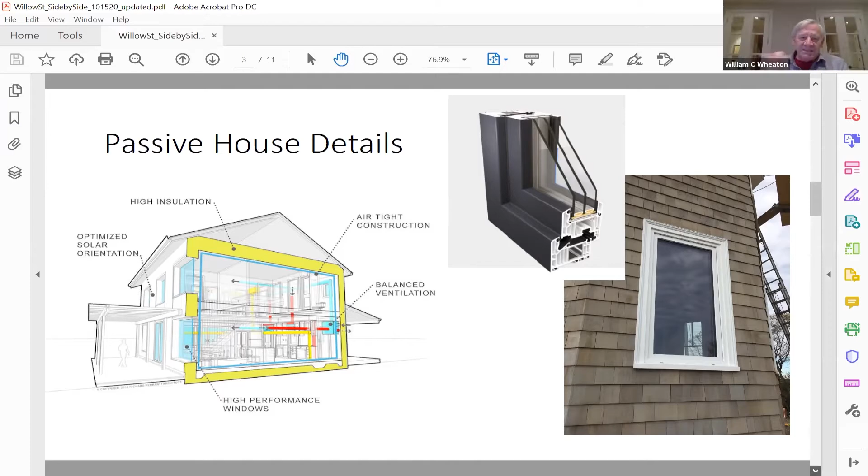I understand, yeah. I would be against that. I don't have any interest in seeing that kind of window, don't find it interesting at all. I like just seeing the plain window with what I call cell bars.

Well, why don't I follow up on it? I'm happy to follow up on it. To the degree that there's a continuing debate, I don't see the need for that kind of stuff.

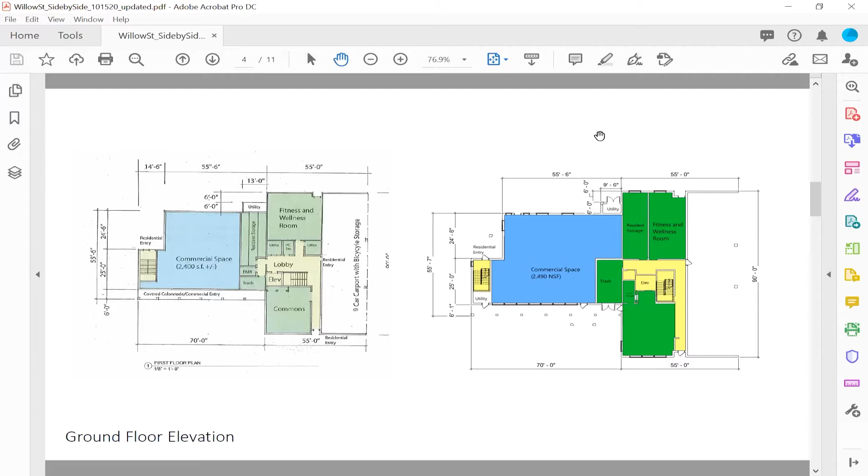Besides which, you can buy, I've seen plastic ones that you can put on the inside and they just snap in and out of place, and they look on the outside like they're there, but they aren't there.

So this is what was, I apologize, it came later than I had hoped, but hopefully this side by side cuts to the chase for you a little bit. Let's talk about some of the changes that you see. I'll walk through these, and feel free to stop me at any time. If I'm going to answer the question in the next slide, I'll tell you.

So on the left, you see the rendering that was approved, or the floor plan that was approved, and on the right, you see our Revit model. So this is like real 3D modeling, whereas before they were more conceptual sketches, which is totally normal given where they were at that stage.

Couple of changes—really no change in the net square footage of the commercial space. I don't know that this was ever really 2,400 square feet when we sort of reached it over. We need a little larger trash room to account for potential commercial use as well. We thought the fitness and wellness room we could fit, we might sort of bend this around a little bit.

Ultimately what we're going to have here, even though these are two separate colors—one showing an egress path—I hope to have an open sort of area for what they've called the commons. This will be a double-sided elevator. It's not showing very well right now, but this will be a double-sided elevator.

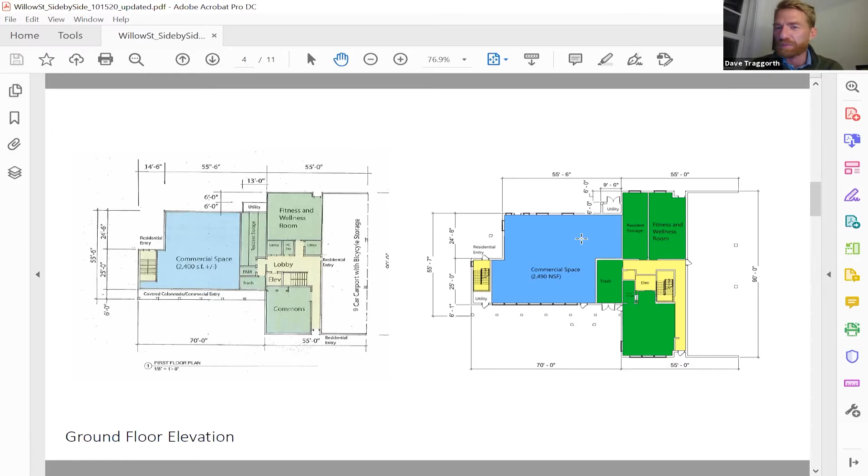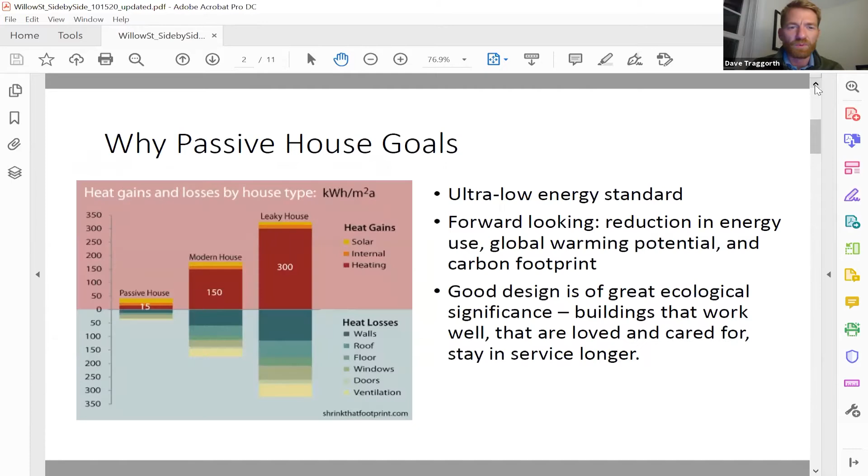There are decisions we've made that could have picked up a little more energy performance, or made things easier from a different perspective, that we have not done because we want to keep it as it appears. It's kind of a funny answer, but I think it's related to the fact that this was permitted. My house has cedar shakes, it has a gable roof, it has all of these things, and I like it. We liked the design.

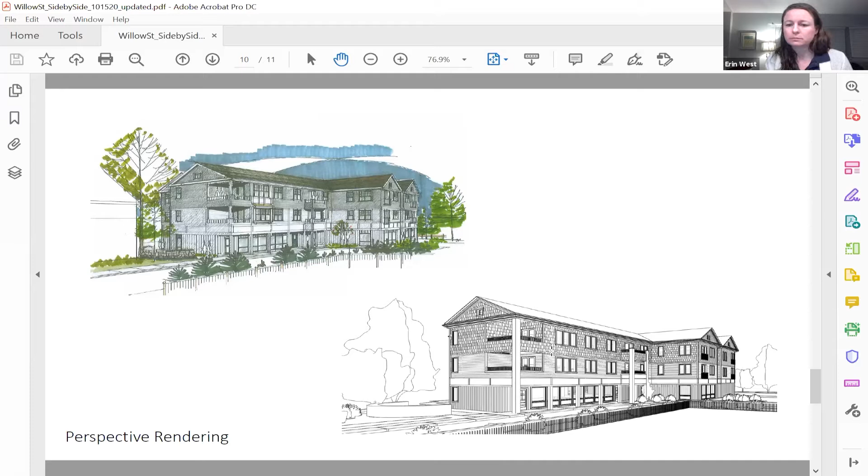I think we have some architects on the board and others, we're happy to take your comments. This is absolutely not a finished product, and I think more minds looking at this, the better. Can we do everything? No, but I love getting the feedback.

One of the things that I think is really helpful in a building is to help make the entryways and the main doors more prominent. I think that might be an area you may want to focus on that could be useful.

Very much agree. So basically the main entry door is right here. I think we want to figure out how to tell people, hey, the entry is right here, so you know where to go. There's a lot of glass and a lot of doors. I think we have to figure out the same challenge for the commercial space.

Well, that's all I have, folks.

Yeah, this is Dan Ham. The big thing that I see when I'm looking at this elevation in particular, and also in the 3D, is that the lines aren't really broken up at all on the second and third floor, and it kind of reminds me of a hotel. I don't think we want to go that direction in that area of the town, or any area of our town.

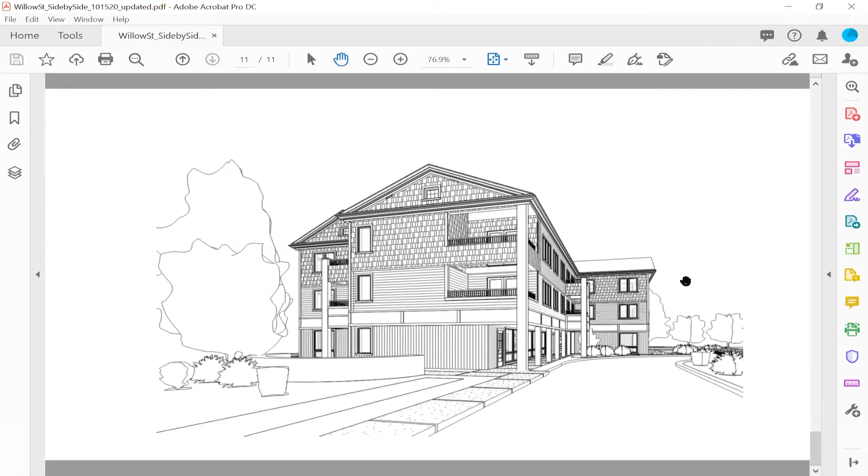To be honest, it's going to be end on to the street. You're either going to be driving in or walking, right? And the entry point's all the way over here. The commercial space is obviously right here. But that gives you just a little bit of a - this is sort of like if you're standing in the neighbor's house looking at the building, this is what you'd see.

So I think the two primary facades in my mind are this one, which is facing the parking and the driveway - you're coming in from here, driving down in front of the building and around. To be honest, this one, because you're going to be turning around and coming in to park, right?

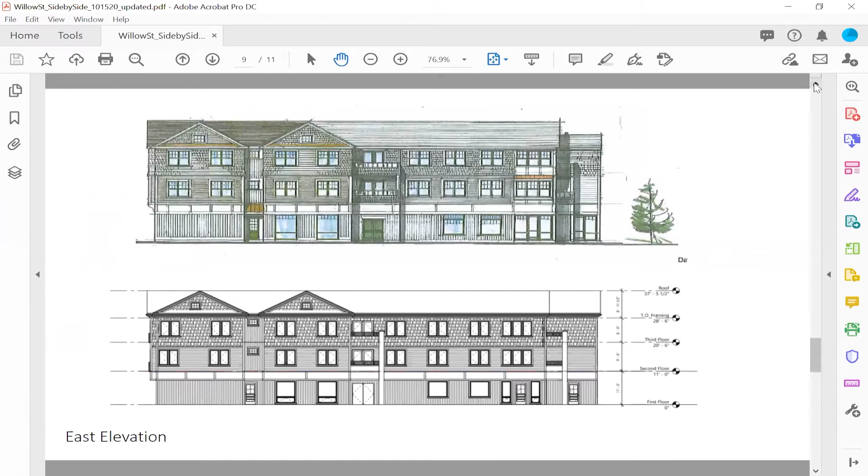But the back side of the building is this. Very few people are going to see this elevation. Right, but I think the other two are critical because you'll see one completely from the Black Cow parking lot and the bank, and between. And then you also see the other elevation, the west elevation, through the trees.

Yeah, no, I completely agree with you - those are the two primary facades. I think if you break it up in materials, it should work. Yeah, let us study this. You've got it broken up on the right side by the gables, and let us study this a little bit more. Right, totally. Okay, and then do check out the windows.

Richard has his view, but it's certainly true that the more traditional windows in New England are all muntin bars. I'm not pushing any particular scheme, but just any 2-over-2, whatever - just see what's possible. Yeah, we will absolutely talk to the manufacturer.

I agree with Bill on that as well. I think that if you have this traditional design, then clearly you would have some type of window that had mullions of some sort, whether they're plastic inserts or integral to the windows themselves. I think that would be consistent with a traditional New England design. Okay.

Dave, Rick Mitchell, I know I'm not supposed to be talking, but this is just a question. On the west elevation in your modification, those two ends, I don't know what you call them, where they bump out.

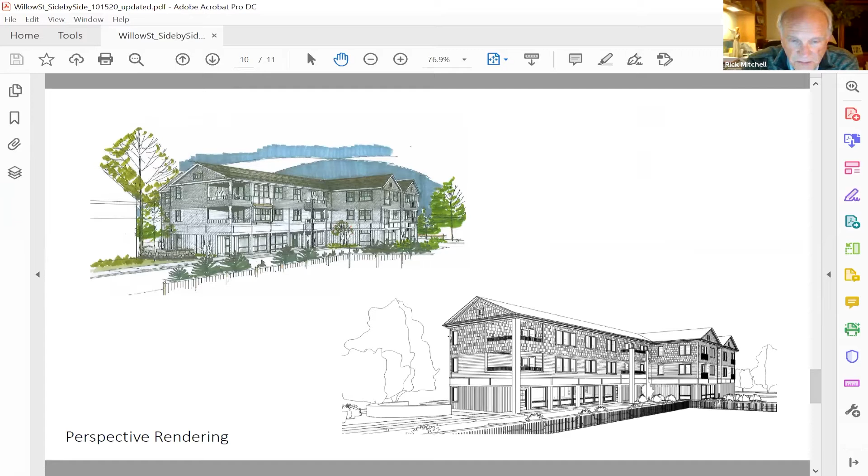So on this drawing, it looks like it's one continuous facade. Yeah, there's... there you see it. Yep, on the west elevation you don't. And that's why I think Dan and other people look at it and it looks like one slab.

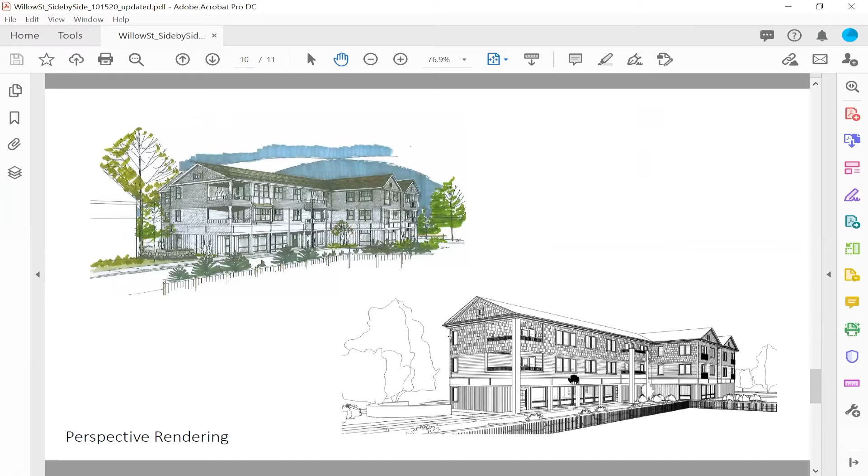I think it looks like one slab in this view too, Rick. Yeah, I see what Dan is saying. I think you're both right in the sense that it definitely breaks it up as far as these coming way out, and you've got these indentations here where this entry is. I think we need to figure out this corner a little better. And we're totally up for that.

Okay, great. So you guys have some homework, and we have to decide tonight if it's a minor or major. I think what would be helpful for me is if you guys could approve this as a minor. Obviously it's your choice, but this is what would be helpful for moving everything along. Approve it as a minor mod, approve these plans with maybe just two conditions: to come back and talk about the windows and to talk about that corner.

That would be fantastic. Can I ask you one more question? Yeah, simple. Where is Willow Street in relation to the drawing that you've got up right now? You would be standing on Willow Street. Okay.

So that's the front of the building, correct or not? That's the front of the building, although there's a lot of depth to this image. Right, so this is the closest to you, this is the next closest, and then these two wings behind are furthest away. Okay, but it's behind a barber shop and a toy store as well. Right, that's true too. Yeah, I mean the Max is right here, basically.

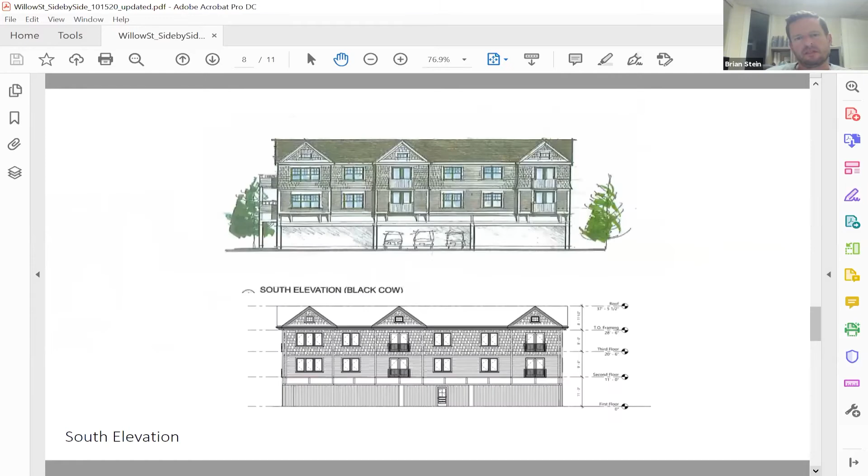Can I make one quick... sorry, I was looking away. Where is Max? So this is the elevation right here. Okay, that's that gable, that's the other gable. And Max is right to your left on this elevation, on this view.

Yep, so all of those buildings are going to be gone? No, Max is staying. Oh, Max is staying. It's just a single family home there currently. Yeah, this is in place of the single family home. Okay, so Max will continue to be what it is. No change.

There was another question, I think. Can I make one quick comment? Yeah. In the same boat as Rick, but not that this will do a lot, because you've already broken it up with the balcony on the west elevation. Those two balconies — can you go back to that elevation real quick? Yep.

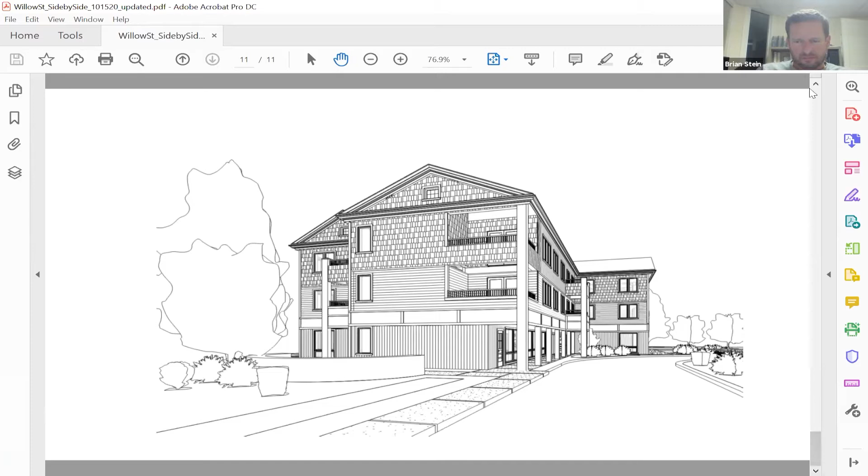Yeah, so in the middle of there, the balconies that stick out there. Yeah, those. What if you put a roof on top of the third floor one, a gable, that would help protect that, and the one below, and might break that up a little bit. I mean, it's got a little depth already with that, but having that extra roof might help overall break that mass up a bit. Yeah, we'll study that.

Patrick, might I suggest that the board approve or say that the floor plans, the amendments to the floor plans, are truly minor? Nobody's had any question about that. And that the questions people are raising are all about small exterior changes, and we just hold off on that for a week or two and see what Dave can come up with.

Is that part of what the meeting is to go on? Yeah, I think that's perfectly acceptable, that the board finds the revised floor plans you've submitted are fine. Nobody seems to have any questions about them. And then we hold off on the exterior, since the majority of the talk is sort of coming on the bump out.

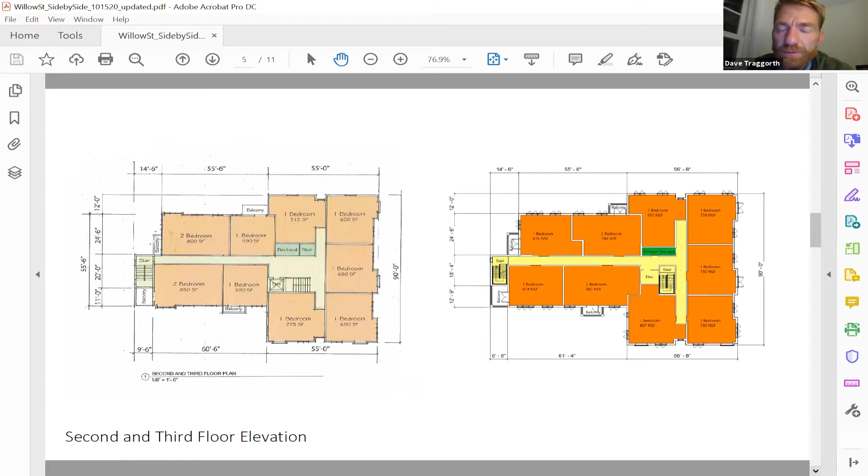So I'm fine with that as well. But to be clear, the floor plan change created the bump out going away, which created the facade problem. Yeah, I think that's one thing that would be helpful, is to tie those two together, and why I'm being specific about what you would like to study further. And it'll also just help us keep everything moving.

So if it could be that approval, but for window grills, and but for the materiality of the west elevation that you want to talk about more, then that would be ideal in my mind, because it really is tied to the floor plans. And I think I'm also totally game for coming back to you all at a later point and talking about color, materials, more specifically — like what color is this, what are these — as we start to really color this in.

But I think what we want to make sure is that we have a building shell and a floor plan that we can really move forward with.

I have a comment that came to me about needing to vary the ridge line some as well. Is that something that is possible? So this is interesting.

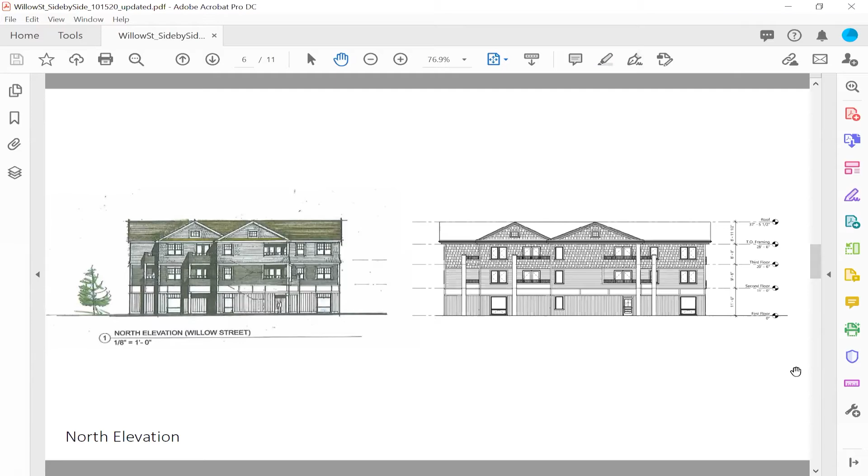And I think that's one point where, with the views of the building, you won't notice the roof line as much. Yeah.

So what's the flavor of the board? Can we get a motion from anyone? I mean, I think it's definitely a minor change, and I commend them for keeping the intent.

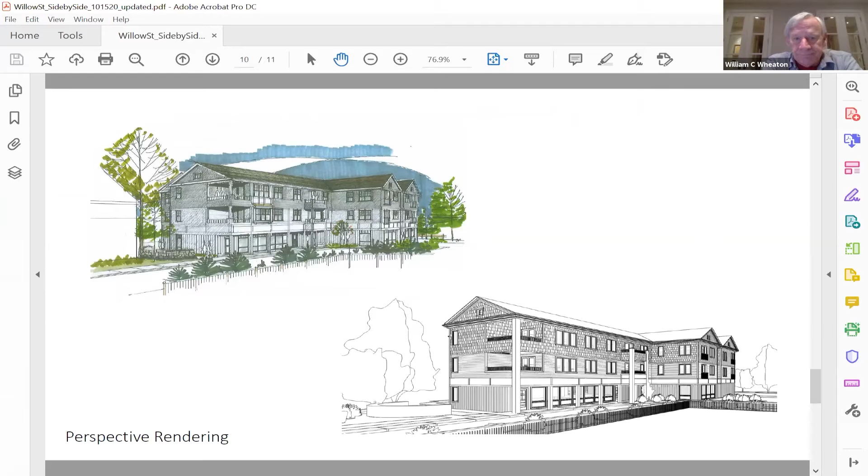So I would make a motion that the board approve the overall modified floor plans, footprint, floor plans, unit configuration, and scale. And we just hold off on the exterior for further review of modifications, minor modifications.

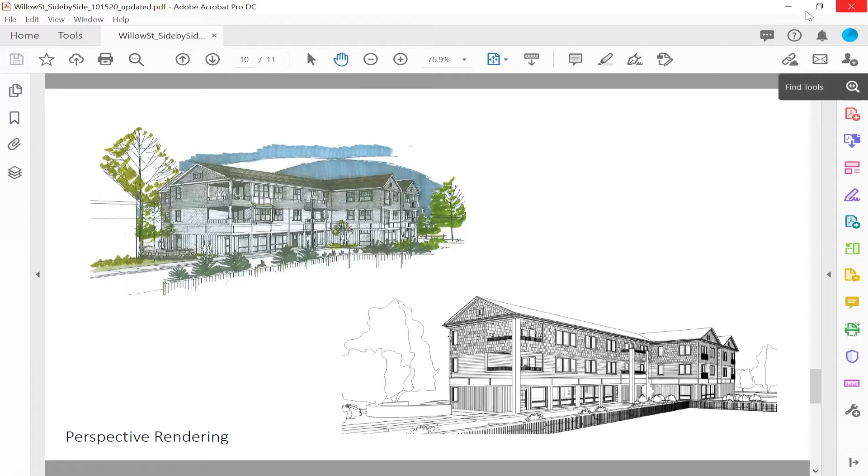I think it could be contingent on it. It just depends on... I think it should be contingent on it. I mean, I think their intent is pretty clean and fitting with character, and I think we're just asking them to do really a materials change versus any real structural or physical change.

Just as long as Patrick's willing to bring it back in front of us, versus putting all the pressure on him to approve any of those material or physical changes. But there is a motion. Is there a second right now on that? I'm happy to amend that motion. Patrick, you want to chime in here about how we ought to phrase this?

Sure. I think you'd want to make the motion that the board accepts the floor plan as shown on the electronic plans transmitted to the board on October the 15th are acceptable to the board as submitted.

Yes, and we just say that. Yeah, simple as that. So there's no negativity anywhere. Yes, I would make that motion. Do we have a second? Second.

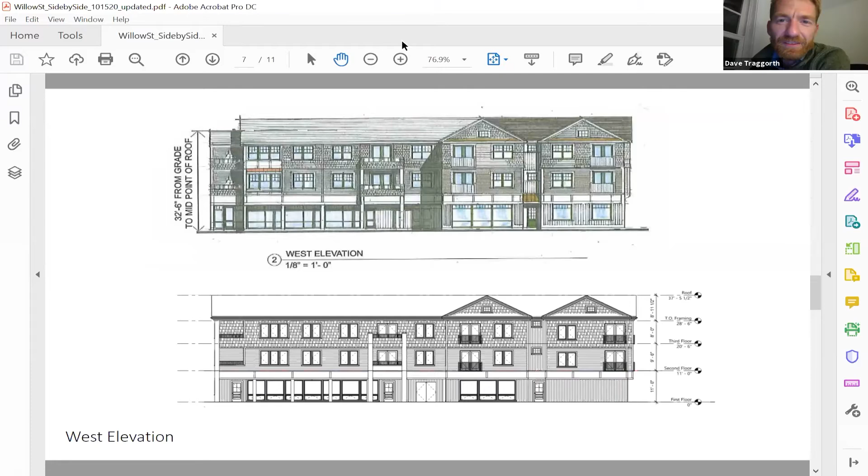Okay, great. We'll be here, so that's about 3 weeks. We'll be there. You recall, typically we meet on the first Tuesday of the month, and there's a little event happening on the first Tuesday of November.

I haven't noticed. And then 2 weeks, or the week after that, had some holiday implications, so we decided to just do it on the 17th. If we could get on the agenda, that'd be great, because I think we'll definitely have this ready to go. I think just in terms of setting expectations, I don't think we'll have color palettes picked out by that point, but we'll have the change in materials potentially, at the corners, and be able to talk about that in more detail. Maybe we'll see.

And Dave, do you know when you might hear from DHCD? Any minute. Okay, 2 to 3 weeks. All right, so can you pass over control back to Patrick? I think he's got it. All right, Brian, it's all yours. I think Patrick, you're still the host. So I think I'm good.

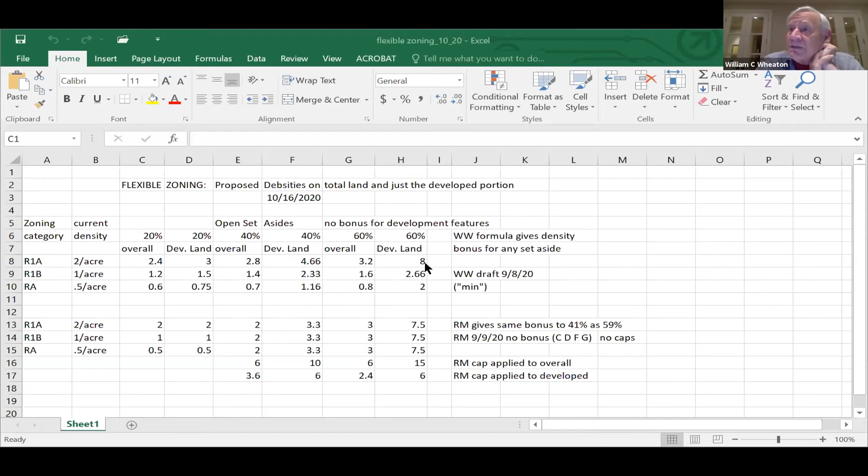I don't know if anyone would agree with that supposition and how it would play out with Bill's redraft of this matrix. But that's what we're already allowing. What we're saying is because the cluster would have a little less impact since there'd be some public land there, you can actually build more units. That's the way this system works. Well, I just think, in terms of the public's perception in the RA district, it might not be as overwhelming as in the other districts.

And so the density might be able to be increased slightly. I mean, I agree with you that if it gets the RA district, it becomes too dense, then people will react negatively. But, you know, the larger parcels can accommodate more units per acre than the smaller parcels.

Again, I think we have to think about caps on this, however. Oh, yeah, no, I have no issue with caps. I think that's the only way this will happen. Yeah, absolutely. No, but you're totally right.

A well-designed project with that much open space is a start. In some cases, not every case, it will even be hidden from view in ways, right? Maybe not from one abutter, but from the vast majority it may be fairly hidden depending on where it is. So in some cases it won't.

Well, you look at the boulders in Wenham. That's a lovely development, but you really don't see it from the street. Right. And, obviously there's some impact to a few direct abutters there, but you're right, you don't see it from the main road where it has more impact on more people.

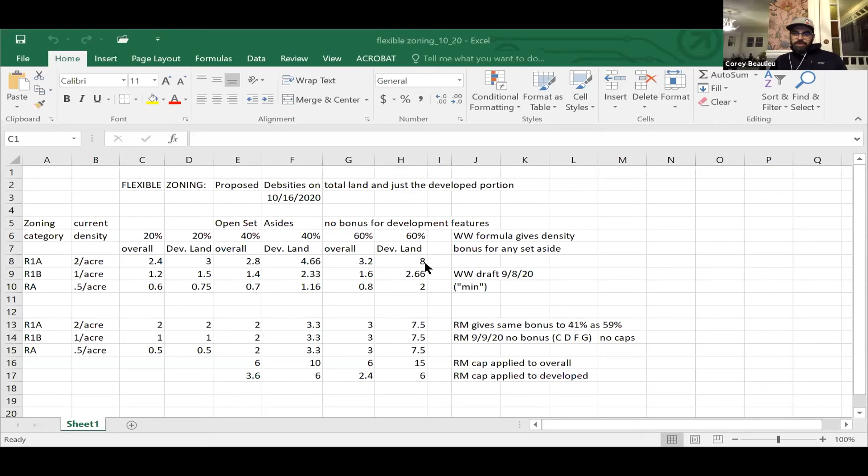Well, the other point I'll make, and this is really critical, I had some language to this effect in one of the drafts that I circulated, but I eliminated it because further on in the bylaw, and I don't know if anybody's actually read this or gone beyond the matrix, the board does have the discretion to approve or disapprove any development under this special permit.

So this matrix is a guide. It's not a promise. And that's really critical. Right. And to thinking about this, it's just a guide. It's a suggestion. You might be able to do this, or you might not. It's also possibly a cap.

No, I completely agree, Marty, and that's a good point that in the verbiage it does say that. However, from a political standpoint, most people want to know: what's possible? What might the board approve? Because some people don't like the planning board, don't trust the planning board. So I think the chart is absolutely critical, because a lot of people will say, look, this is what's possible.

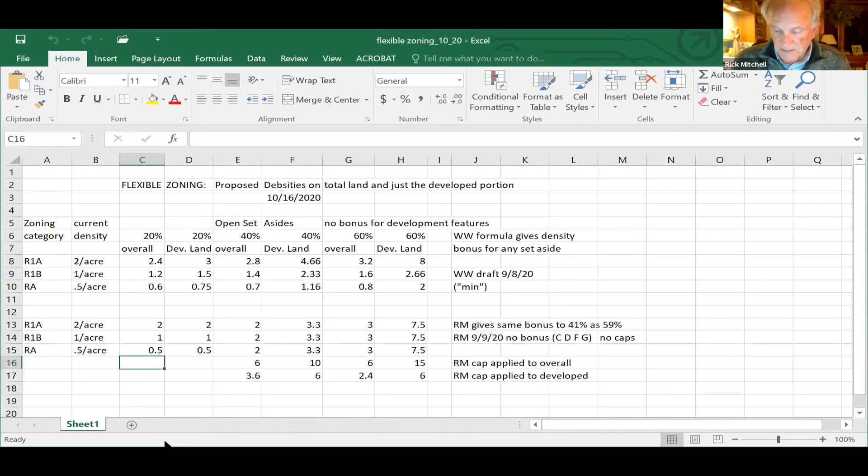There's a flip side to that, Marty - it is discretionary, it always has been discretionary. And the caps will be important. If we copy them from the senior housing bylaw, we can say mileage, total townwide, total per acre - those are clear restrictions. If we're going to get developers to actually look at this, knowing it's a discretionary permit, and they're going to invest tens, if not hundreds of thousands of dollars to bring this to the planning board, they need clarity in terms of the guidelines. And there needs to be enough potential density there for them to undertake this.

So that's one of the things - I don't want to go so low that people look at it and go, well geez, this is a crapshoot, I don't know if I'll actually get this approved. They need some incentive. Some of us have been doing this long enough where you get the public's perception, or at least the few people that attend these, and then a developer's perception, and it's somewhere in the middle that's the magic number - what's tolerable, but what will actually work, and what a developer would actually use.

So they're going to shoot high just like anyone would in their shoes, and others are going to shoot low - abutters, townspeople, or even us. I think that's how it worked with senior housing, if I'm not misspeaking, Rick, but I wasn't there for all of that. But I think that's what happened - you just worked that matrix, put the caps in, and that's how it got approved. Yeah, I think that's what got it over the edge - the distance, the total cap townwide, the total cap per units, and the total cap per project. Because people will always assume what potentially could be the worst, look at it and say, oh well it could be X. So yeah, those safeguards will help.

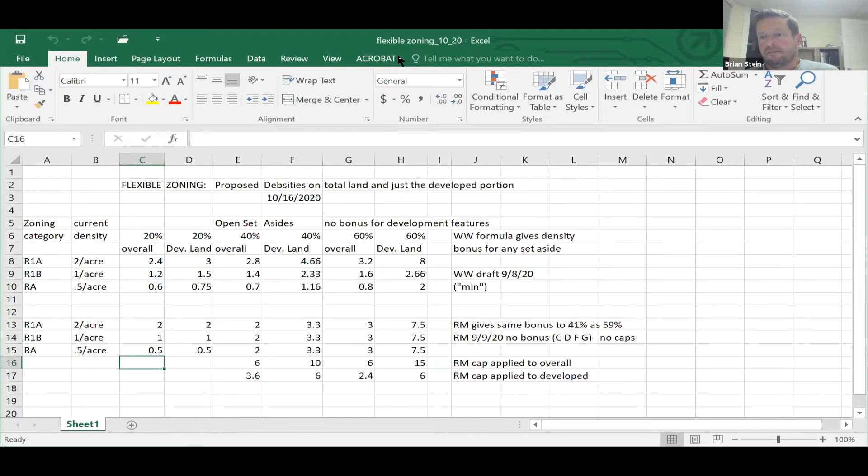Yeah, and that's been in place for what, 8 or 10 years now, or more? Probably at least 10 years. 10 or 12 I guess, because I've been here 10 or 11. And we've got 2 projects, and now maybe 3 at some point coming up. But in 10 or 12 years, people were afraid of these things being all over town, and yeah, we put the cap on, but we've had 2, right? And they're out in a similar area, not that far apart, and we've got maybe 30, 35 units between the 2. So we're not close to the 100 or 150 that the max is. We haven't been close to the 50 per year max. So I think people's fears don't always come to fruition on things like this.

That's just another side of things. I think that's a good point to remember when we're working to get this new bylaw passed, to remind people of what happened in the past. Does it always ring true with every bylaw? No, but that's why these maximums are important for something like this. You're just not going to get rampant development projects using this bylaw all over our town - it's just not going to happen. First of all, you've got a problem just finding enough open space in the districts to do it. And the space has land costs - all these sites are getting trickier and trickier to build on.

So Bill, you've got some homework to do. Can you get this out at least a week in advance rather than a day or 2, so we have time to actually look at it? I'll try my best. Oh, it would be good if you could actually promise us to come forth with something. I promise it won't be one day before - it'll be 2 days before. I'll give you at least a week since we meet on Tuesdays. I'll give it to you at least the weekend before.